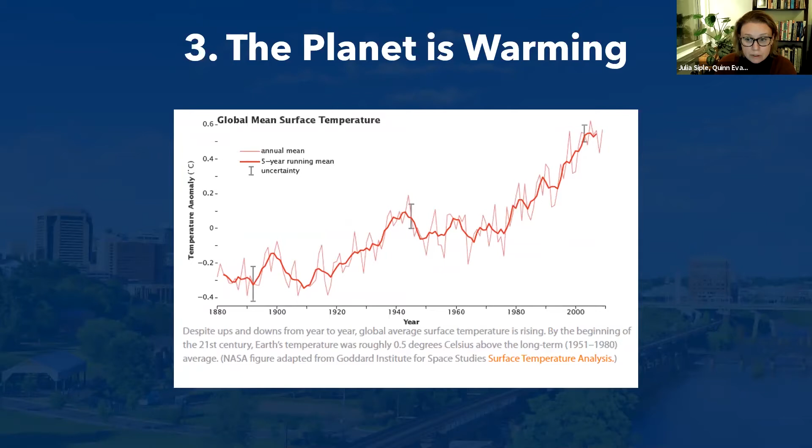So one is population is growing. We know that in the US, we're expected to gain another 100 million people over the next 40 years. We see that more people live in cities, so there's a move towards more urban environments. I did see a stat that in Richmond, that equates to about 200 new residents every week. And then the planet is warming. If we look at average global surface temperatures, that's rapidly increasing. So what are we going to do to address that and mitigate those impacts? So with that context of change, how will our built environment change? And how do we make sure that we're really making the best places to live amidst that change?

So with that, I guess, wanting to just think about what does it mean to create this human created landscape. I love kind of looking at this image here of the vista of Richmond to think about what it really took in order to create what's there today. What is that going to look like over time? And how do we really adapt and make the best of that?

And so I think that really gets at some of the heart of the issues of preservation and sustainability, meaning this long-lasting, very positive impact for the future that really acknowledges community and people. So recognizing that history, memories associated with place, equity, accessibility, health, that the aspects of people and community and history are really important. And then there's this component of resources.

So how do we make sure we're thinking about all of the effort it took to get what is there today, and how do we keep that running? So I think there's ways that we would like to better quantify and value and prepare as we think towards the future in that.

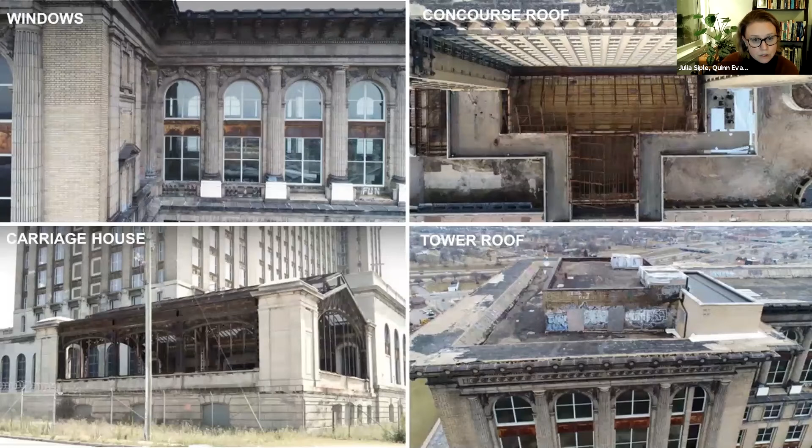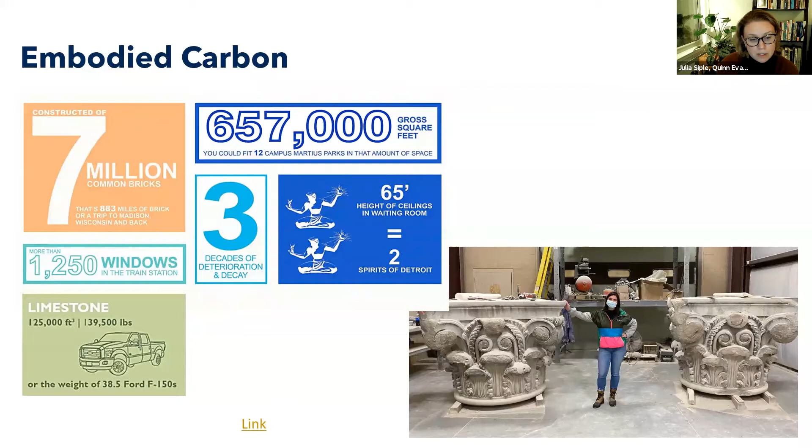So in each of these quick project examples, and this is a project that has beautiful features but has been abandoned for 30 years. So how do we think about valuing and maintaining a lot of that history and a lot of that material, which is significant? And so how do we start to frame the significance of what is there as something that was an investment of materials, and that is a resource to be valued?

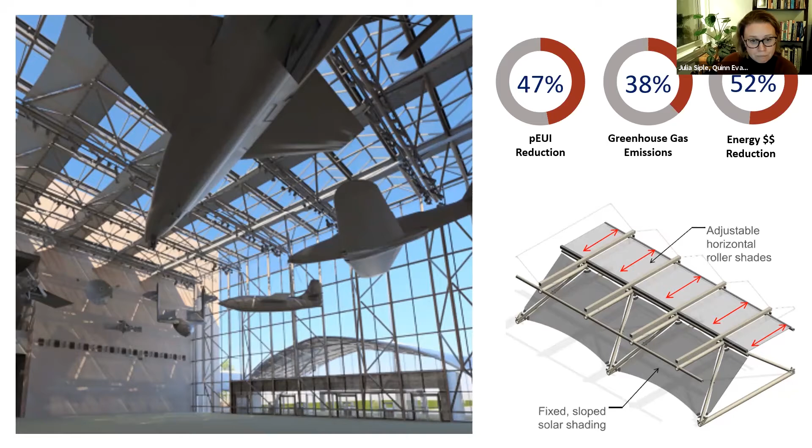So here's another example, just thinking about how do we adapt existing spaces to be energy efficient? How does that drive down energy use? How does energy relate to carbon? How does carbon relate to dollars? I think it's how we start to string these things together that makes them more meaningful and relatable.

And so then the last very quick example here, because I want to give us plenty of time to talk, is the Plaza building, which was originally an office building, then a mid-century modern office building, and then was transformed into a residential building. So again, how do we think about a very long life for our buildings, thinking about different stages of renewal, and thinking about the investment of carbon over time and how that relates not just to the energy in those buildings, but the material.

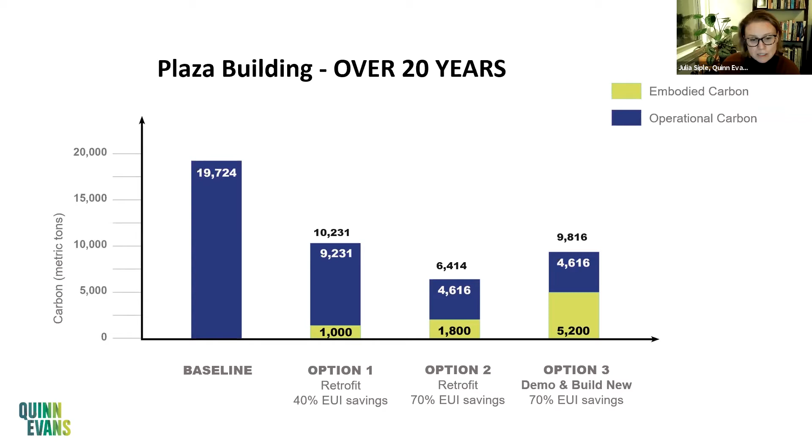And so I think this investment in material and the original place and how we value that as a resource is something that we'll get into further here. But I think embodied carbon is one of the things that we see as particularly important to demonstrating why preservation and existing reuse is one of the most important things if we are able to take climate action and really make an impact on carbon.

So wanting to give a little context of how we're starting to think about this, and some other projects come up with ways that we can see and measure it, because that makes it a lot more possible to manage things if you're able to value them and make comparisons. So then for carbon, getting back to what is invested in our buildings, how is carbon relatable? Carbon is primarily generated anytime there's combustion, so burning of fuel.

So all of the energy to create our buildings, the material to get them in place took a lot of energy to produce and move those buildings there, and materials there, and then to keep them running. So energy use is an ongoing use of carbon. So this might be familiar to some, totally new to others. But when we talk about carbon and carbon in our buildings, what does that mean? What parts of the building have carbon?

Carbon is basically something that describes what it took to create every aspect or to keep the building running. So we're talking about manufacturing and transporting materials, installing it and putting it on the construction site, keeping it running. So if you're running with gas, there's combustion at site. If you're getting it from your grid, that energy is created somewhere.

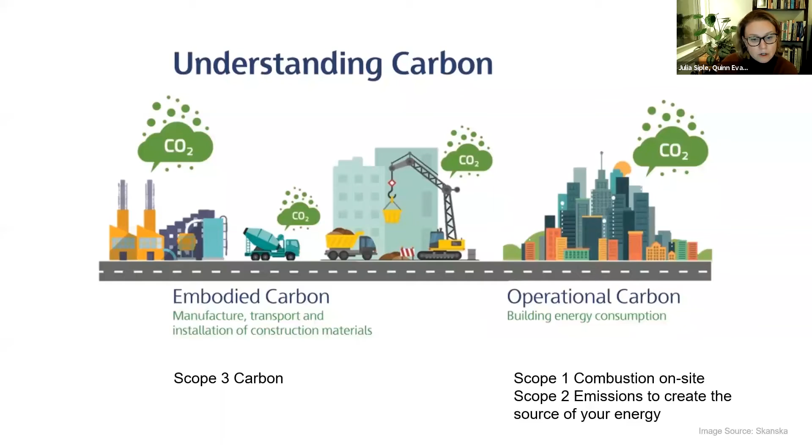So there's different types of carbon, and the building industry in particular talks about it in these two forms, embodied and operational, where embodied is kind of the material side of things, and operations is what do we do to keep it running? That's our energy. And Danielle talked about this a little bit at the beginning about how globally our buildings are kind of responsible for about 40% of global greenhouse gases.

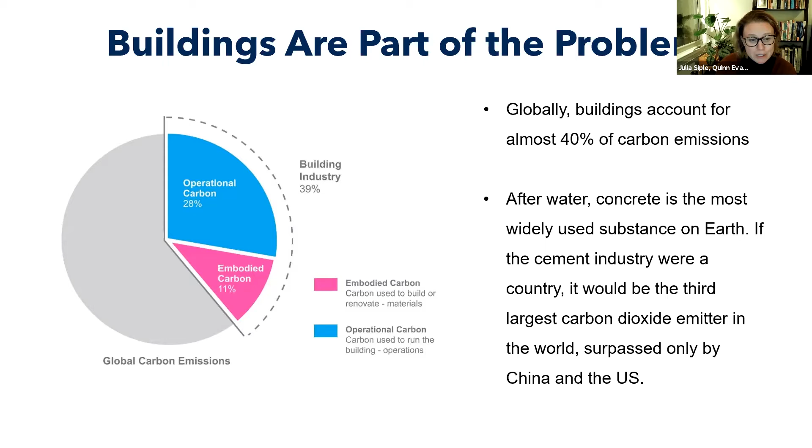If we look at that pie, about 28% of that is actually operational energy and 11% is embodied. So again, materials versus operational, the energy to run it. That's a lot of energy and carbon related to creating materials. And what is particularly interesting is that we see a lot of policies and progress about reducing operational carbon, codes, greening the grid. There's many ways that we're making pretty significant strides to operational carbon reductions. And as that continues to happen, the proportion and the relevance of embodied carbon continues to go up.

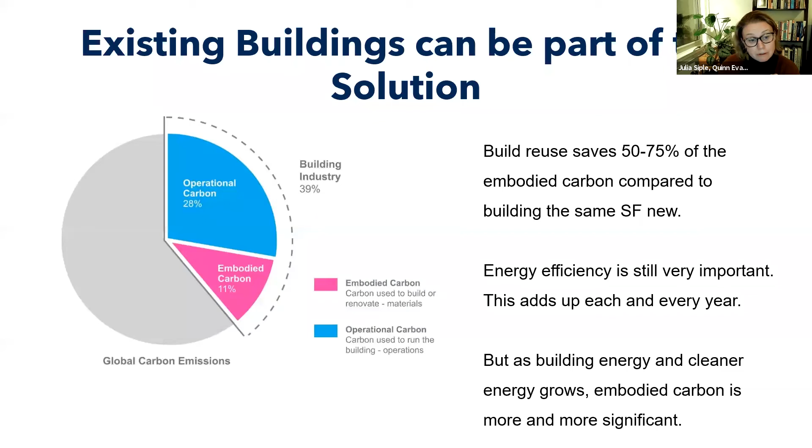So I think it's super important that we continue to retrofit our buildings and make them energy efficient. But I think that how we quantify that value of embodied carbon and embodied carbon being avoided by reusing a building is increasingly important. So why do we care about carbon? How do we start to measure it? How does it feel relatable?

All metrics are only as useful as they're understandable. So if you give me a number, it doesn't mean anything until you have something that it relates to. Carbon is very tightly associated with the temperature rise. So it is the metric that we are aiming at reducing in order to meet our climate goals. And if you look industry-wide at policy, at potential incentives, there are a number of goals, and this is also starting to appear at the state level or city level or university level, goals for carbon. And I think Rob will get into this a little bit, where you look at where are we trying to make reductions to avoid these changes over the years.

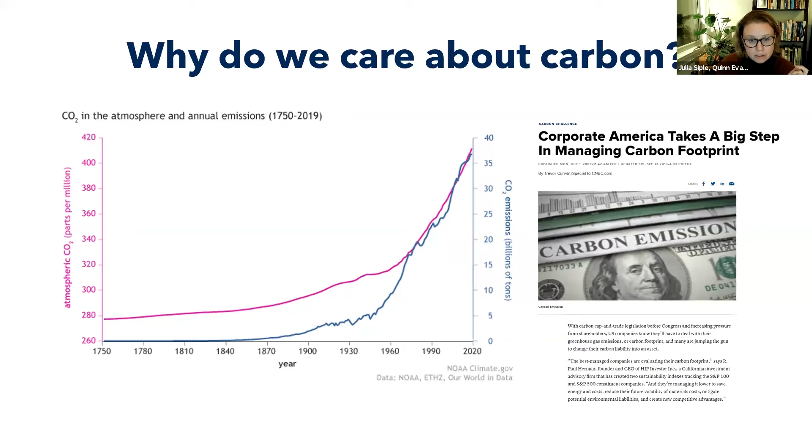And so lastly, as we tee things off to hand this over to Rob, just really emphasizing that when it comes to carbon and valuing this investment, our buildings new and old really have to play a role in carbon reduction. So to meet the Paris Agreement, and if we're gonna hold global warming to less than 1.5 degrees Celsius, it means that not only are we trying to make really big strides in our energy performance, which is still really important, but we need to also value the existing buildings and the carbon that's associated with creating those in the first place. And so I think better ways to measure and value that are things that we really hope to see in the tighter connection between sustainability and preservation.

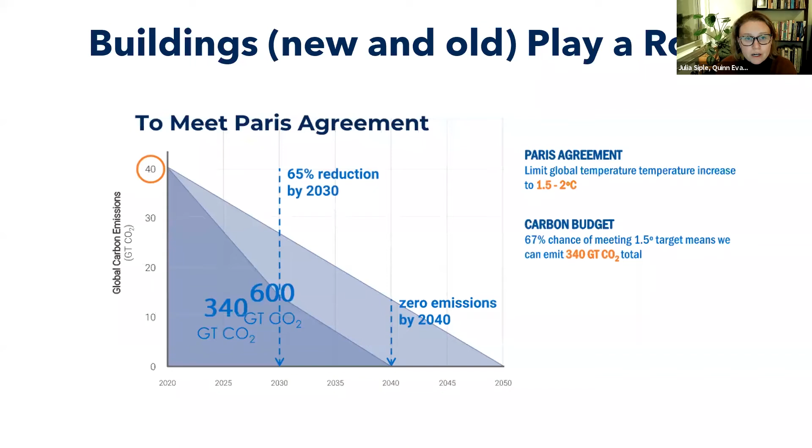So with that, I will turn things over to Rob to talk about sustainability at U of R.

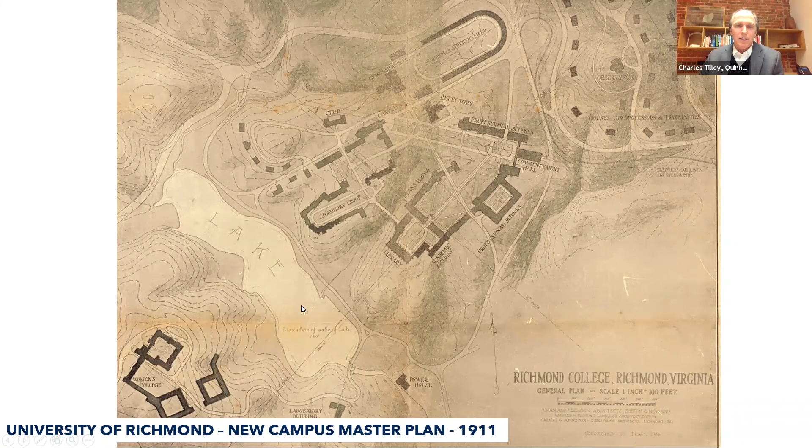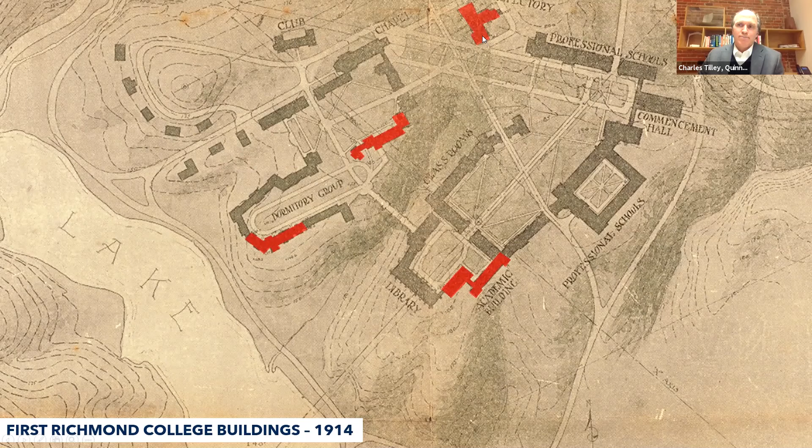And in this plan, you can see this is the original master plan. The lakes here on the south side is the Women's College, or Westhampton College, and then the men's side, which was Richmond College at the time. And those first four original buildings, Ryland's here on the right. It's the first academic building on campus here. And then Jeter and Thomas, which were residential dorms at the time. And then Sarah Brunet Hall, which was the refectory, or the dining hall.

So Cram was known most for his mastery of the collegiate Gothic style, which is a type of Gothic revival architecture that was popular on academic campuses and religious buildings in the late 1800s and 1900s. And Cram was active in other areas of Virginia, or Richmond as well. He designed the Virginia War Memorial Carillon over at Byrd Park, as well as the master plan and some buildings over on Sweet Briar's campus, about the same time as U of R. He's also well known for the Rice University master plan, West Point, as well as St. Thomas Church in New York City.

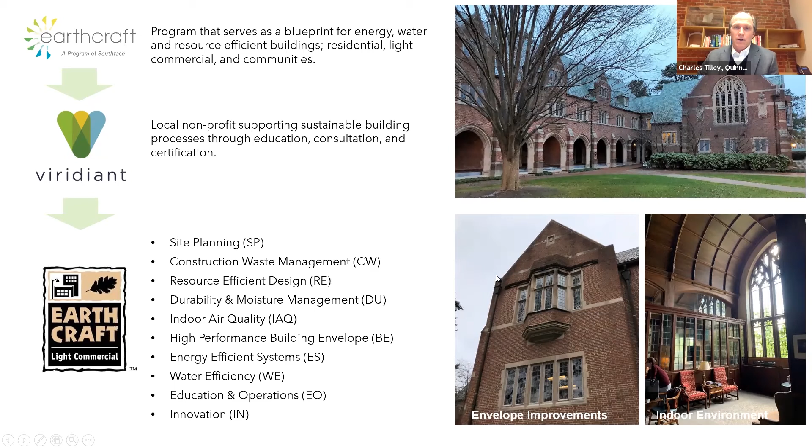And also indoor air quality. One of the biggest components of this project is full mechanical renovation of the entire building, and replacing all of those systems and providing fresh air into the spaces. You can see the typical mechanical unit that is sitting on the floor in most of the rooms. These were not ducted units, so they didn't have fresh air. They were really just recycling it. So we're providing fresh air to all the spaces now. And then also improving all of the lighting, even beyond some of the upgrades that were done several years back. This system would be 40% more efficient than what the current code requirements are.

Again, talking about durability and moisture management, waterproofing the basement, the lower half of the first floor here. There's a partial basement around the building. And so keeping water out was important, and repairing a lot of the damaged surfaces with the cast stone, which, 100-year-old cast stone has several issues, and repairing in place and touching up the masonry around the building.

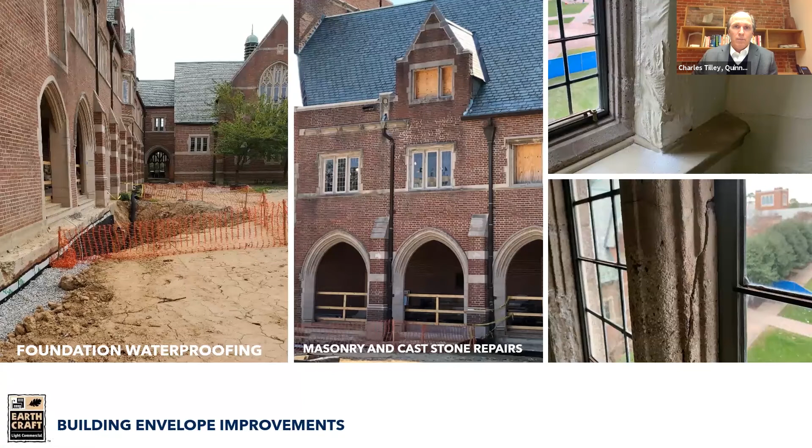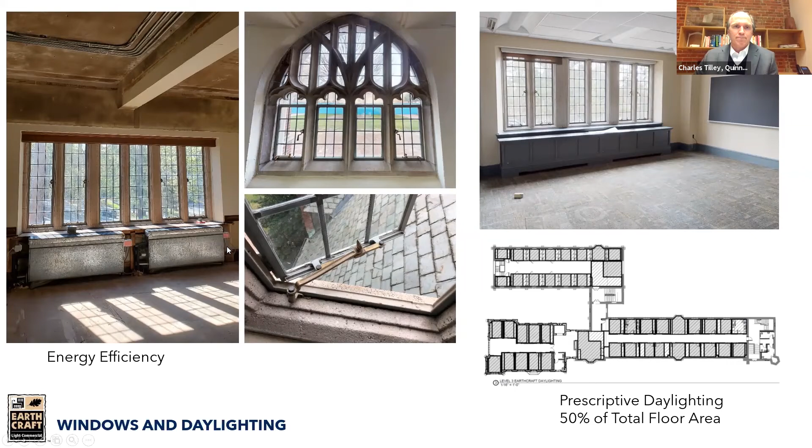And then you can see the windows, a lot of the windows are being replaced with new thermally efficient windows. There are several places where we're carefully doing that with the stone tracery, but one of the best parts about this building is the windows, and you can really see with EarthCraft the amount of light that the exterior windows bring into the spaces. And that's one of the points that we're getting as you look at the EarthCraft list.

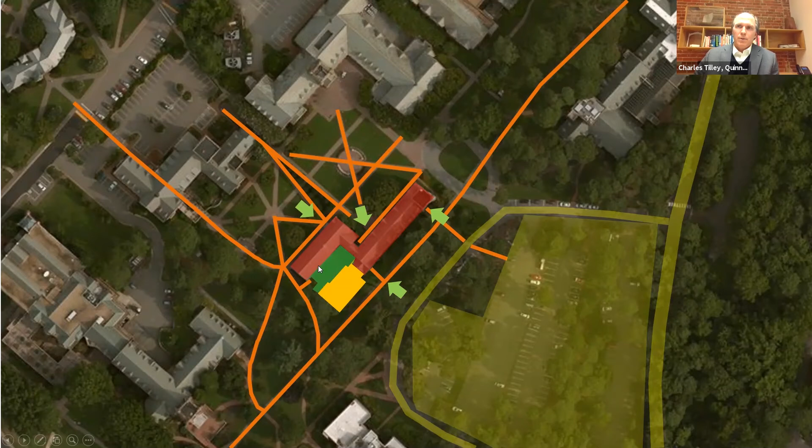In the campus plan here, Ryland's here in the center, and all of the orange highlights are campus student paths. And you can see one of the major issues that we dealt with was bringing people into the building because most of the entrances are on the west side, really trying to connect the building to the site in a different way. And so providing a new entrance off of this side and then expanding the building to the south. And that gave us the opportunity to create a courtyard between these two spaces.

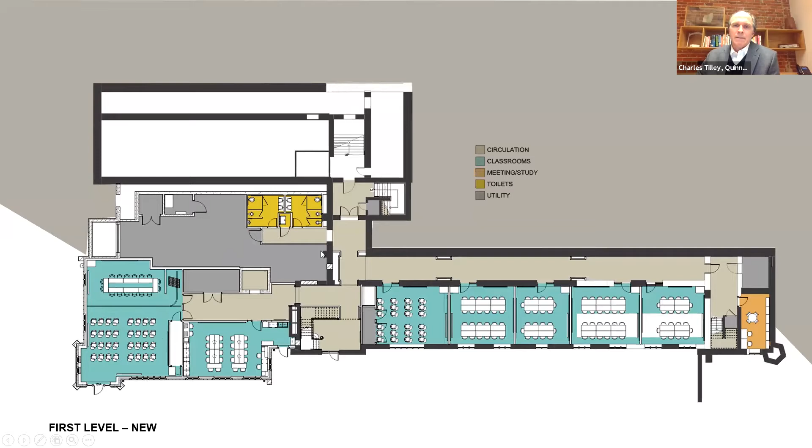A quick view of the plan. The first floor classroom, this is partially underground. This side faces the student main path, creating a new entrance off this side, which allows the students to have easier access into the building. And then a new addition here to the left, which is the main mechanical that we're replacing and sharing with the whole building. On the second floor, which is the quad side of the building, or the quad level of the building, if you will.

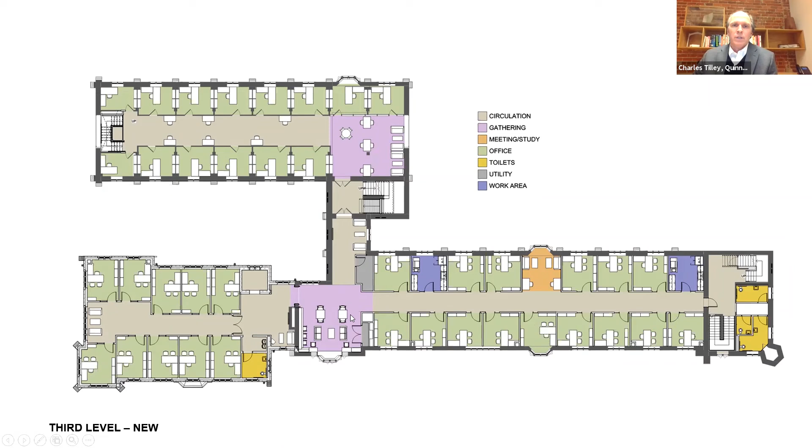These are mostly classrooms and the student commons space that we've added, and that faces this courtyard, really great courtyard between the new building and the original two-story library. The third floor was office space, and we renovated that to office space and gave every faculty member an exterior window, which was really important for their individual needs, but we also provided some spaces within this level for students and faculty in the purple area here to gather and meet out in the open areas.

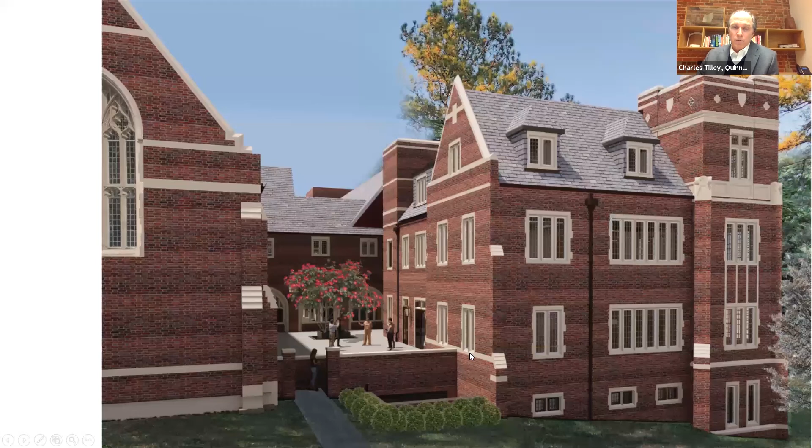And in the courtyard, or the future courtyard on the eastern side of the Great Hall, which is here to the left, there were these existing cherry trees that we needed to remove to make room for our mechanical courtyard or mechanical space. And so we placed a large tree planter in the middle of that courtyard to allow us to replace that and to provide some soft natural landscape within that brick and stone enclosed area.

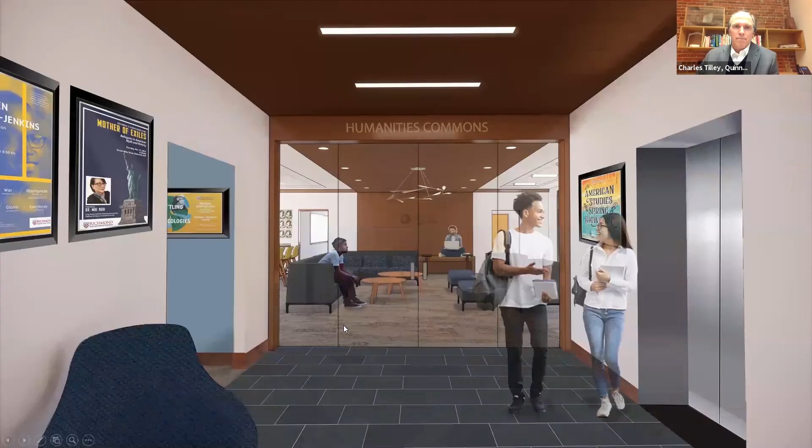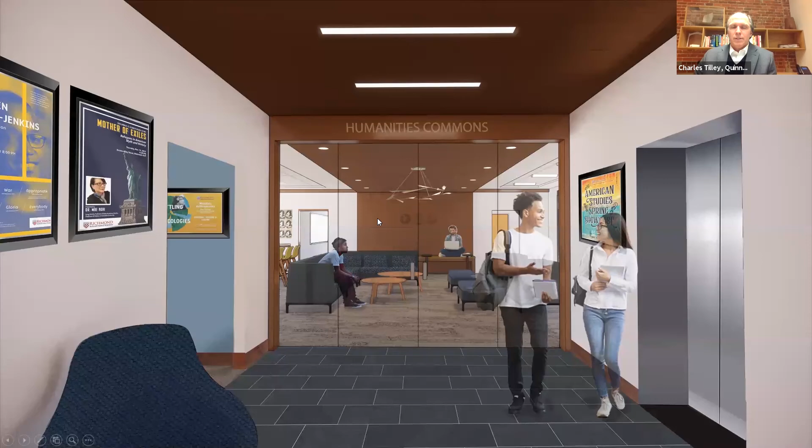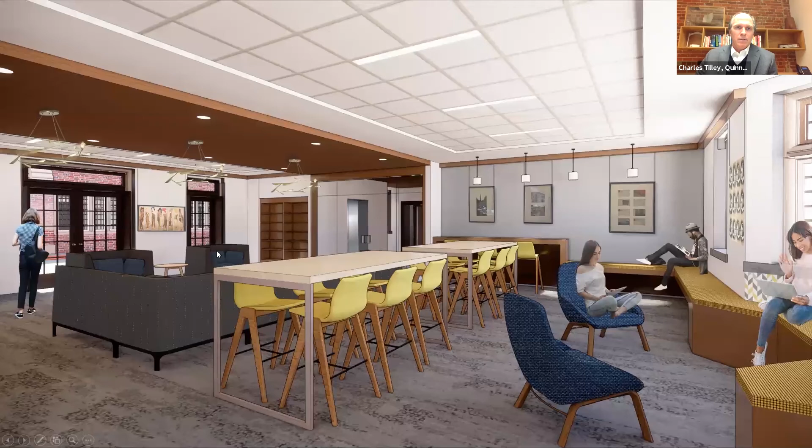So inside the addition, as you move from the existing building into the new student commons, there are spaces with a lot of transparency and openness, using the same sort of stone and darker toned woods that would match up with the original building, providing spaces for students to gather both with faculty or meetings or just to hang out. It's a place for humanities students and for University of Richmond students to gather and to be a part of study groups or what have you. And this also faces out onto the courtyard.

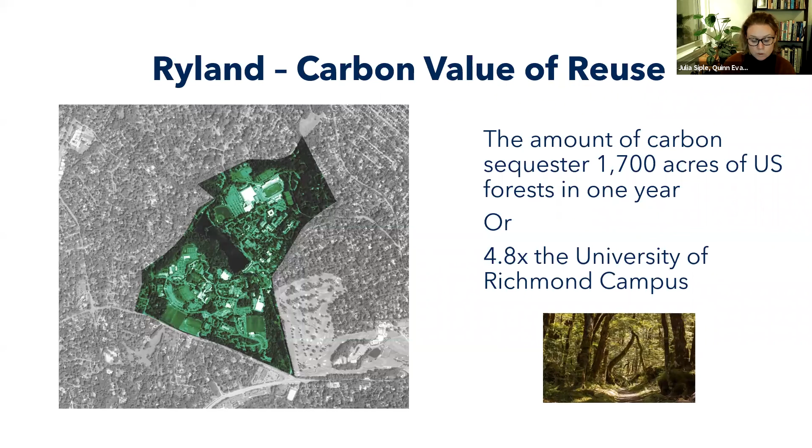So this is our go-to list, in order of priority: if we're really going to make impacts to carbon reduction in our buildings, reuse is first and foremost the biggest thing you could do. That impact of all that material created, I think Danielle made a stat earlier that it takes anywhere from 10 to 80 years to recover that. So avoiding that initial investment and making our buildings last is one of the best things to do.

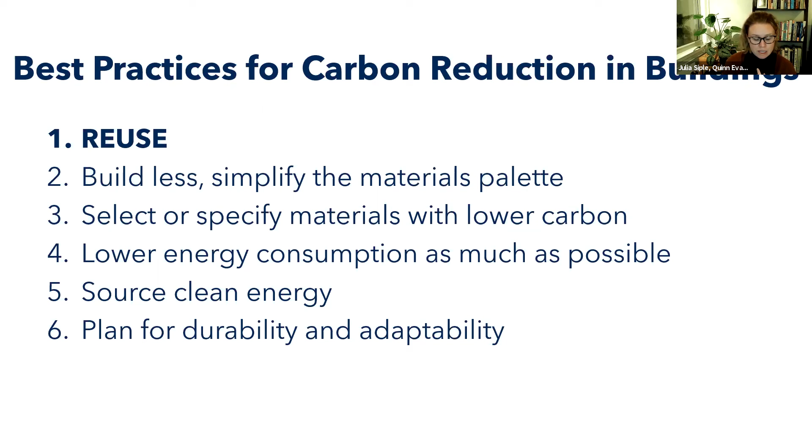So I think hopefully we have some time for questions. I think I saw some great ones popping into the Q&A. Yeah, so on the questions, Rob, I know you answered one of them, but no one else could see the question that you were responding to. So I'm going to read the question that came in and then give you a second, Rob, to speak to that, even though people may have seen what you wrote back.